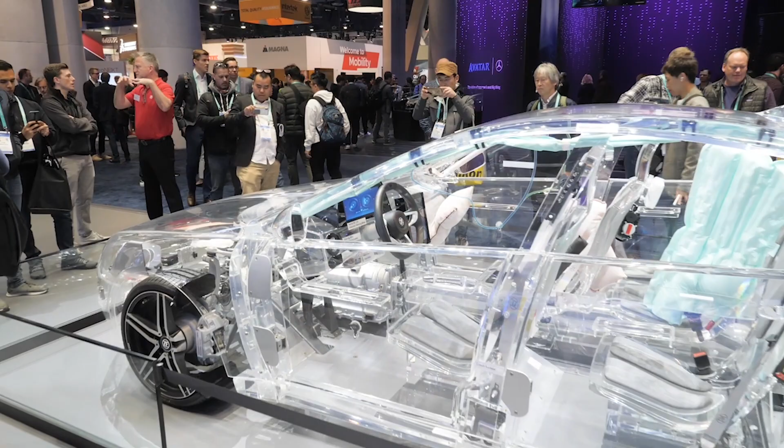CES, Consumer Electronics Show, has just wrapped up in Las Vegas, and it gave us a pretty solid view of where everyday consumer technologies are heading. For one thing, the boats, cars, and trucks you are driving now may soon have the ability to respond to your verbal commands and drive themselves, thanks to AI.

Brunswick manufactures water sports hardware, specifically boating equipment. At CES, the company showcased what it calls marine concepts driven by ADAS, or Advanced Driver Assistance Systems, the same type of onboard system that controls self-driving cars.

So at CES this year, we're excited about AI and applications of machine learning into our product design. So at Brunswick, we are focused on speech recognition, gesture recognition, object detection using computer vision technologies, and we're looking at embedding those technologies into our current products.

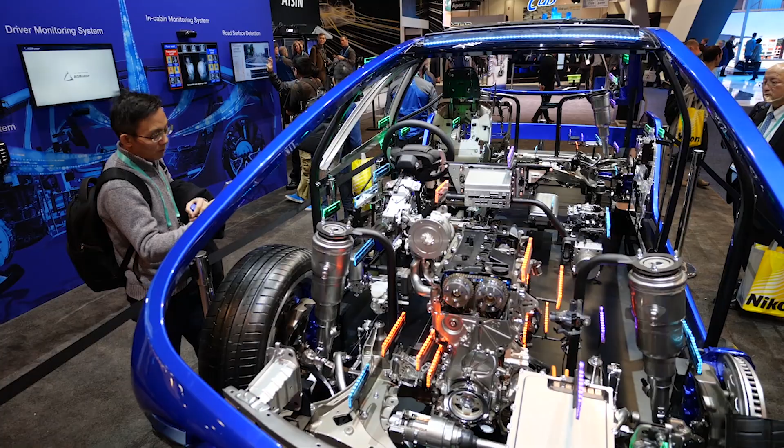Blackberry, the name closely associated with the once dominant handheld personal schedulers and organizers, is making a comeback as part of the autonomous vehicle sector at CES. Some very cool new technology in the automotive sector.

We have safety certified OS and a large set of features on top of that. We're showing Cylance integration, which is a machine learning security company. We're working with AWS in an automotive context. We have a Damon electric motorcycle that we're showcasing here, which is a futuristic electric, very futuristic, safe motorcycle, and lots more technology that we're showcasing here in the automotive space at CES.

BlackBerry's loss of market share was largely related to the emergence of mobile phones, iPhone in particular, which made specialized scheduling and email-capable devices no longer a critical necessity. The company recently refashioned itself as a security technology company, providing security for mobile devices, embedded systems, networks, and remote hardware. Autonomous vehicle is a relatively new market for BlackBerry, so we'll have to watch and see where the company's efforts to hitch a ride in the new sector will lead.

Also at the show, Siemens spokespersons provided more details about the partnership between Siemens and ARM, a processor IP company. The recent announcement between Siemens and ARM about ARM IP being on the Siemens PAVE 360 simulation platform is really industry changing, in that it now brings together all the pieces necessary for automotive manufacturers and their suppliers to start developing the next generation automotive platform, to intersect the roadmaps of 2025 and 2026 and to be able to compete successfully in those model years.

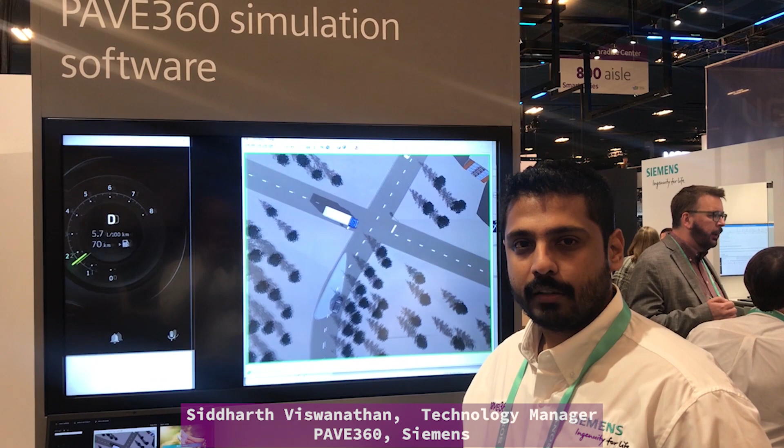The automotive industry is going through a rapid transition. The next generation automotive vehicles are going to have a lot of high compute electronics. We've used similar techniques to validate ICs in the semiconductor industries. And at CES, we have announced a partnership with ARM to implement the best practices to create a digital twin of the automotive vehicle so that they are functionally safe and can be validated before they hit the road.

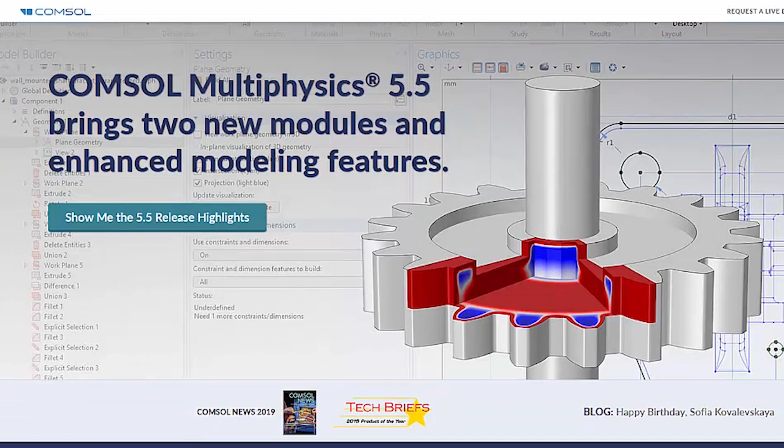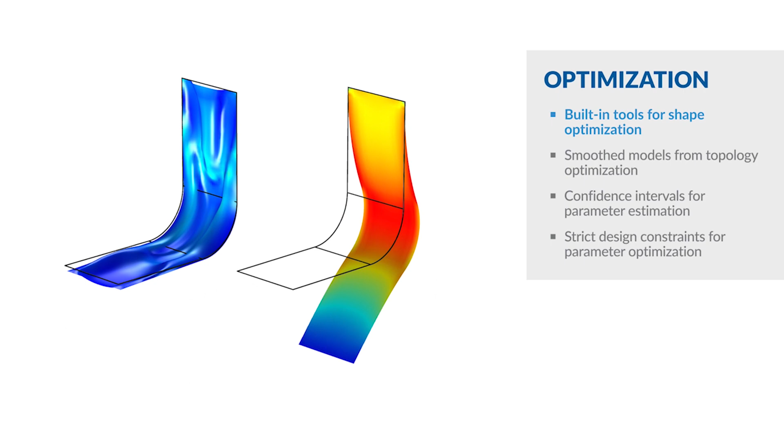Last week, COMSOL released a new version of its simulation suite, COMSOL Multiphysics. In version 5.5, the software gives you a new 2D sketching tool. It's intelligent enough to convert your rough sketches into perfect lines and arcs with symmetries and parametrically editable features. There are smooth geometry output tools for topology optimization. It also gives you the option to enforce design constraints and shape optimization.

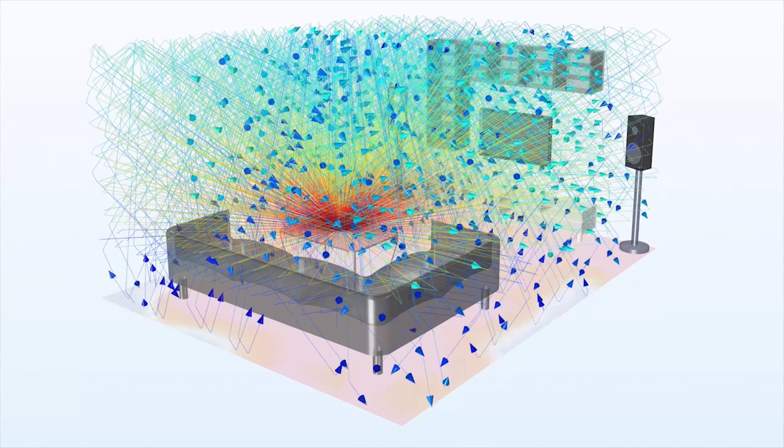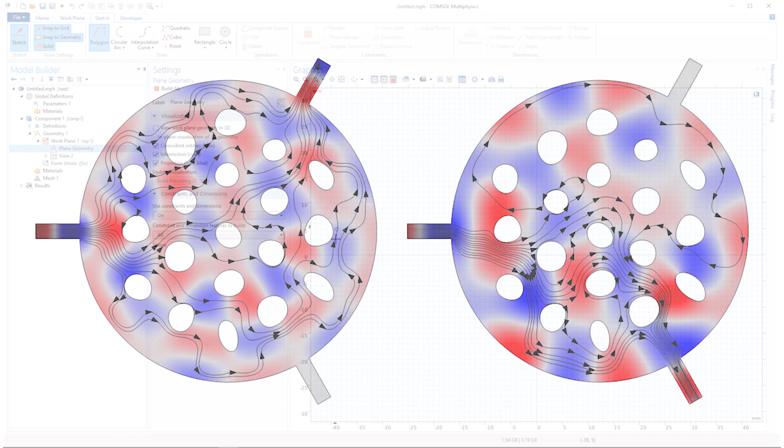The ray acoustics module lets you analyze wave and particle dispersing behavior using ray bouncing as movement paths. You can release near or far field waves and visualize their travel path and interactions on screen. It also includes PLY and 3MF format exports to support additive manufacturing workflows, new tools for editing 3D scanner acquired models and 3D printable formats, a new solver in the acoustic module to tackle larger models that demand more computation, and much more. For a comprehensive list of features in COMSOL Multiphysics 5.5, go to COMSOL's website.

This is all the news for this week. Here are some more footage from CES 2020.